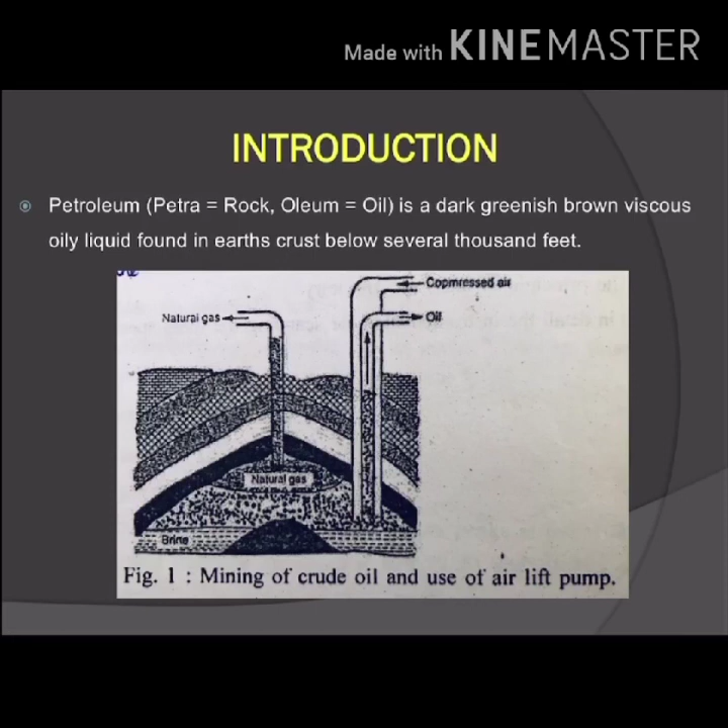What are the compositions or constituents of petroleum? Petroleum mainly consists of hydrocarbons. They may be straight chain paraffins or cycloparaffins, naphthalenes, olefins and aromatics. Along with this, small amounts of organic compounds are also present like nitrogen, oxygen and sulfur. The average composition of crude oil is carbon 79 to 87 percent, hydrogen 11 to 14 percent, sulfur in very minute percentage, that is 0.1 to 3.5 percent, and nitrogen plus oxygen slightly less compared to sulfur, carbon and hydrogen. So carbon is the major content, nearly 79 to 87 percent.

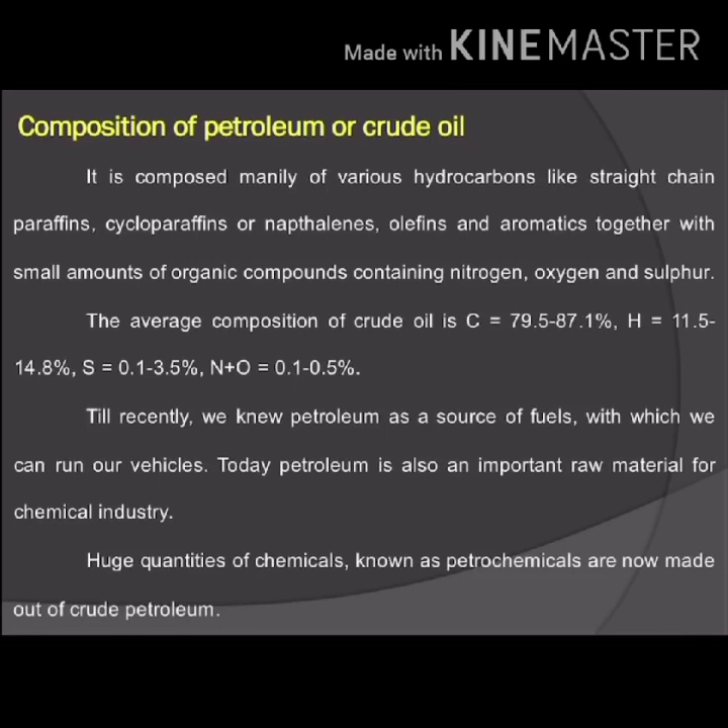Till recently, we knew petroleum as a source of fuels with which we can run our vehicles. Today, petroleum is also an important raw material for the chemical industry. Huge quantities of chemicals known as petrochemicals are now made out of crude petroleum. Now let us see how they are classified.

Based on the compositions or constituents present in the crude oil or petroleum, we classify them into three different types. The first one is paraffinic base type crude, meaning it is mainly composed of saturated hydrocarbons from CH4 to C35H72 with a little naphthalenes and aromatics. The hydrocarbons from C18H38 to C35H72 are semi-solids, also called waxes.

The second class of classification is asphaltic base type crude. It contains mainly cycloparaffins or naphthalenes with smaller amounts of paraffins and aromatic hydrocarbons. The third type of classification is mixed base type crude, meaning it contains both paraffinic and asphaltic hydrocarbons and is generally rich in semi-solid waxes.

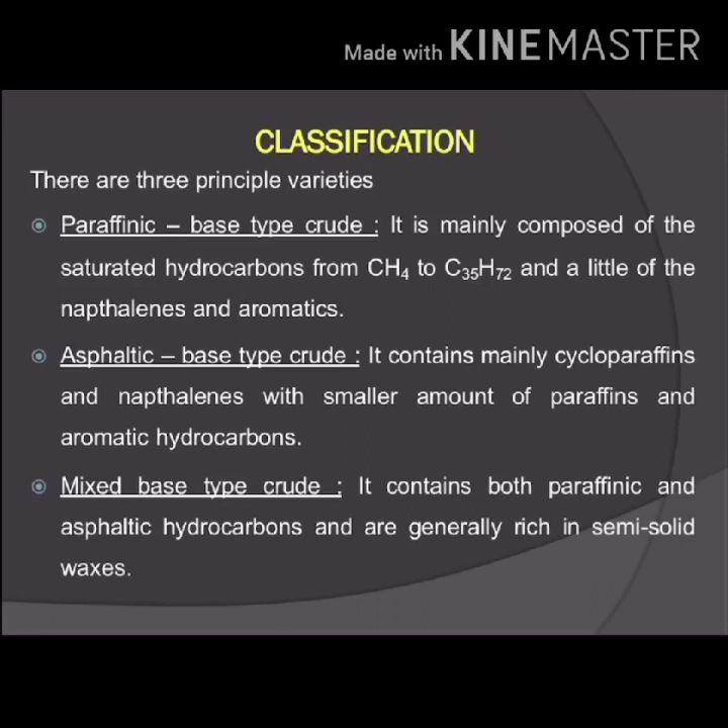Next is petroleum refining. The crude oil or petroleum mined under the earth's crust is composed of many other fuels or substituted products, so it has to be refined before we use it. The crude petroleum has to be processed or refined before being put to commercial use. The process of separating crude oil into various useful fractions by fractional distillation and finally converting into desired specific products is called refining of crude oil.

The plants set up for this purpose are called oil refineries. The refining of petroleum or crude oil involves the following steps.

Step 1: Separation of water by Cottrell's process. In this process, the crude oil obtained from the oil well is an unstable emulsion of oil and salt water, so some amount of water will also be present in the crude oil extracted from under the earth's crust. This water has to be removed, and the removal of water is carried out by Cottrell's process.

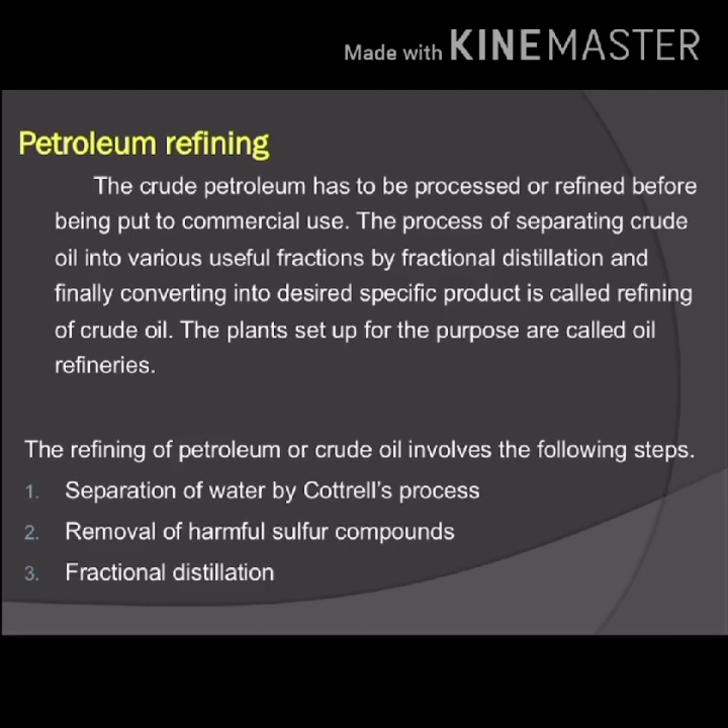The third step is fractional distillation. The crude petroleum is heated to about 400 degrees centigrade in coiled pipes kept in a gas heated furnace. Here we can observe how the fractional distillation is done. All volatile components are evaporated. When the crude petroleum is heated to about 400 degrees centigrade, the volatile compounds—those that can easily get evaporated at normal temperatures—will get evaporated, leaving behind the residue of coke or asphalt.

The vapors obtained are then admitted into a specially designed fractionating column. From here we pass the crude oil inside this fractionating column, which is maintained at 400 degrees centigrade. So as the vapors go up, when the crude oil enters here, it gets vaporized.

As the vapors go up, they become gradually cooler and fractional condensation takes place at different heights of the fractionating column. Higher boiling fractions condense first, while the lower boiling fractions condense turn by turn at a definite temperature range. Here we can observe the temperature at all these stages. At the bottom, the temperature is around 600 degrees centigrade, and as it goes up, the temperature decreases. The vapors going up get condensed and converted into liquids as they rise. Each fraction obtained is a mixture of different hydrocarbons and has certain characteristics which render them useful for definite purposes.

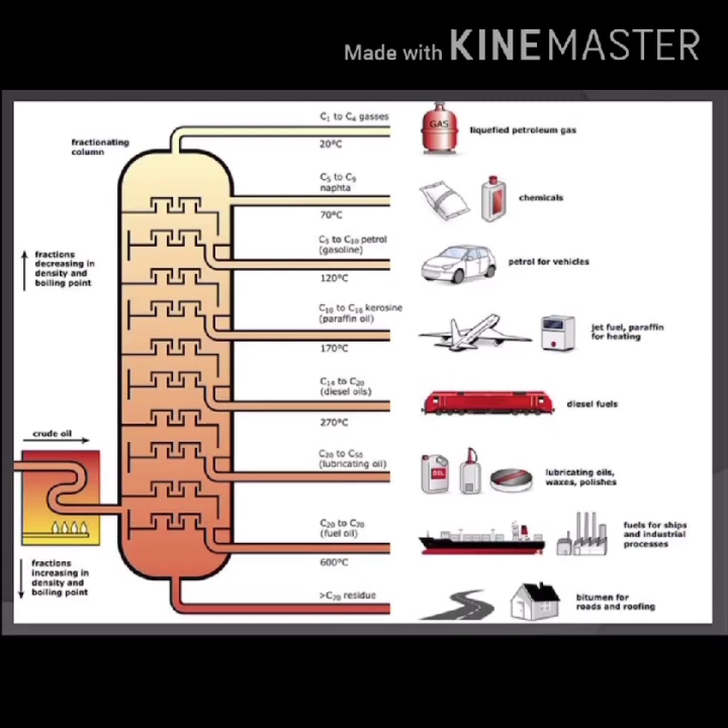The last thing is residue, which is used for the construction of roads and also for the construction of roofs in houses. These are the different important classes of fractions obtained by fractional distillation of crude oil. I have tabulated the same information here.

At different ranges of temperature we get various products such as petroleum ether or gasoline, naphtha or solvent spirit, kerosene or diesel fuel, and heavy oil. At different temperature ranges we get different important fractions of crude oil or petroleum. We can also observe the approximate composition of carbon and hydrogen, the hydrocarbons, ranging from C1 to C30, which is extracted during the fractional distillation of crude oil and petroleum.

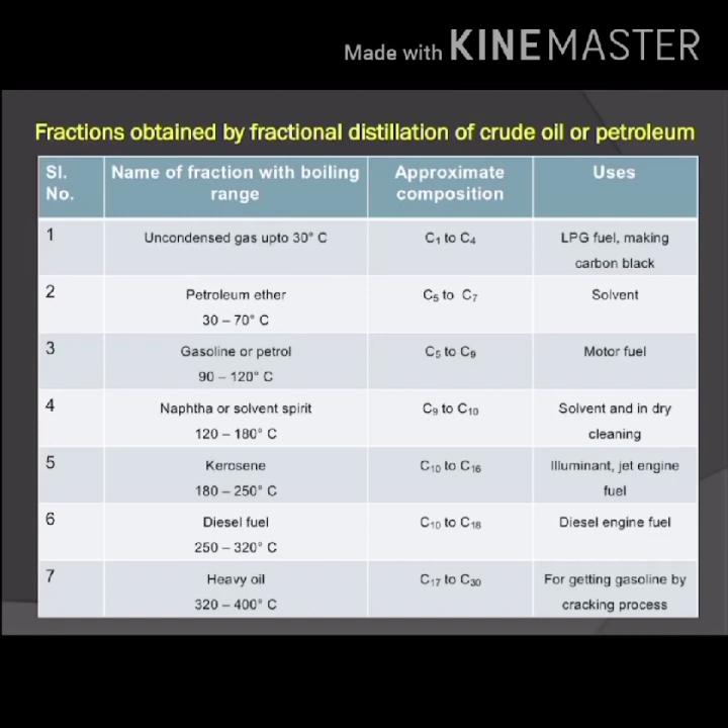The heavy oil obtained during fractional distillation of petroleum can be refractionated further, giving various fractions like lubricating oil used as lubricant, petroleum jelly also used as lubricant and in cosmetics and medicines, grease as lubricant, and paraffin waxes used in candles, boot polishes, wax paper and tarpaulin clothes. These are some other fractions extracted from heavy oil.

Above 400 degrees centigrade, a residue is obtained which may be either asphaltic or petroleum coke, with composition above C30. Asphaltic is used in waterproofing of roofs and road making. Petroleum coke is used as a fuel and in molding or light rods, and also used in protective paints.

Next is, what is meant by cracking?

Before understanding cracking, the various petroleum products given in this table need to be purified prior to use. The purification is essential for these reasons: first, removal of undesirable odors; second, to render them stable to air oxidation; and third, to free them from corrosive constituents. These are the main three reasons why purification is needed before using the heavy oil.

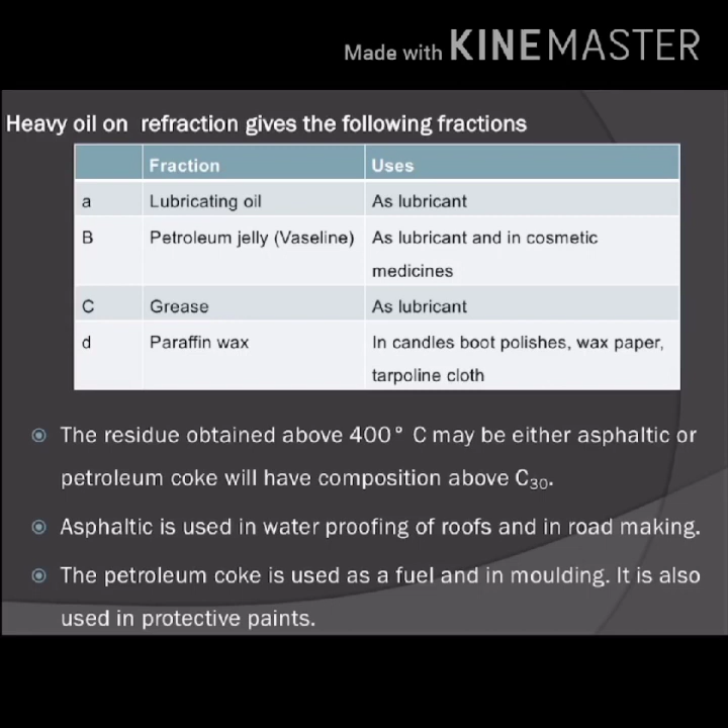The complete removal of sulfur compounds in gasoline is ensured by treating it with sodium plumbite, or by passing vapor of gasoline over alumina or silica at about 450 degrees centigrade under pressure.

What is meant by cracking? The gasoline or petrol has the largest demand as motor fuel, but the yield of this fraction is only 20% of the crude. The quality of straight run petrol is not high; it has to be properly blended. To overcome these difficulties, the middle and heavy oil fractions are cracked to get petrol.

Cracking is defined as the process of breaking down less volatile higher hydrocarbons from petroleum into different types of more volatile lower hydrocarbons. Here in this reaction, C10H22 hydrocarbon under high temperature and high pressure is converted into lower hydrocarbons which are more volatile compared to C10H22.

In the same way, N-decane in the presence of high temperature and high pressure is converted into N-pentane and N-pentene, which have a more volatile nature. So the petrol obtained by cracking has far better characteristics than the straight run petrol. That means straight run petrol is the petrol obtained during fractional distillation, whereas the petrol prepared or synthesized by the process of cracking has far better characteristics.

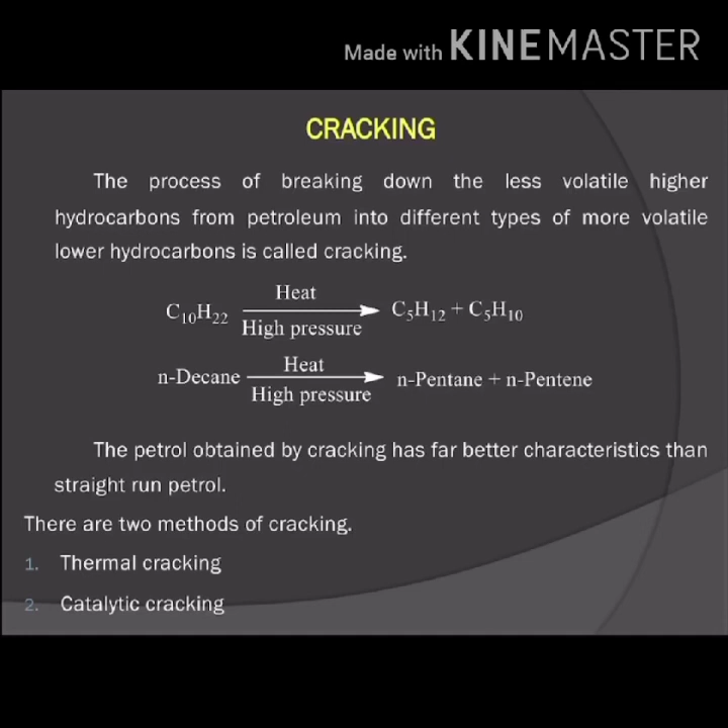So the two methods for cracking are thermal cracking and catalytic cracking. Thermal cracking may be carried out in the vapor phase and also in liquid phase. In vapor phase thermal cracking, the cracking oil is first vaporized and then cracked at about 600 to 650 degrees centigrade under a low pressure of 10 to 20 kg per square centimeter.

It requires less time than liquid phase cracking. The petrol obtained has better anti-knock properties. However, the petrol obtained by this method has poorer stability than the petrol obtained by liquid phase cracking. This method is applicable only to those oils which can be vaporized.

The next method is liquid phase thermal cracking. In this method, the heavy oil stock is cracked at a suitable temperature range of 475 to 530 degrees centigrade and at a pressure of 100 kg per square centimeter. The cracked products are then separated in a fractionating column. The yield is about 50 to 60%, and the octane rating of the petrol is 65 to 70.

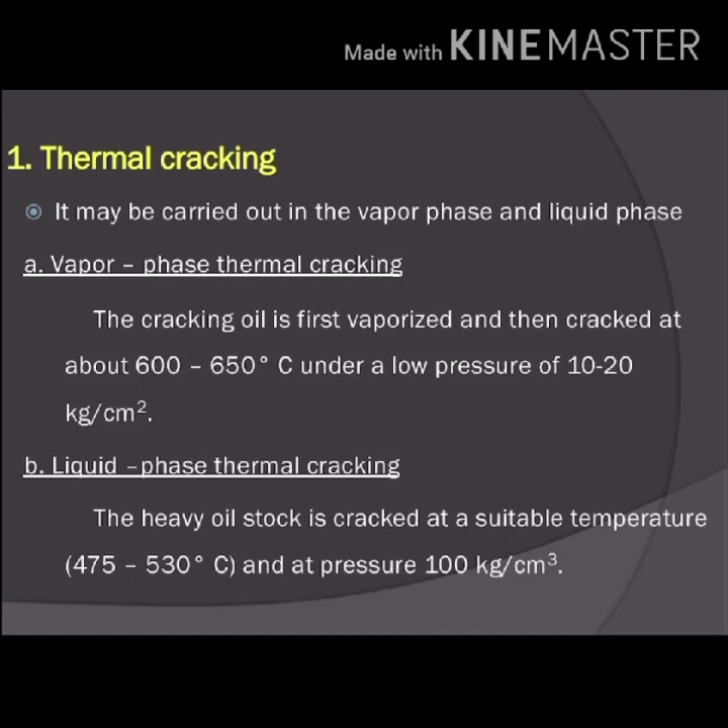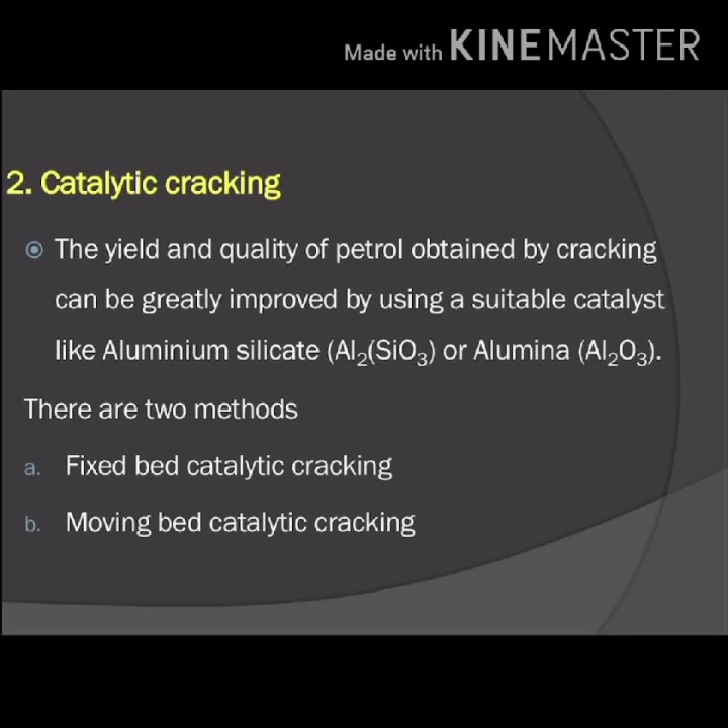The next method of cracking is catalytic cracking. The yield and quality of petrol obtained by cracking can be greatly improved by using a suitable catalyst like aluminum silicate, Al2SiO3 thrice, or alumina Al2O3. There are two methods in catalytic cracking: fixed bed catalytic cracking and moving bed catalytic cracking. Now let us see how cracking is performed using the fixed bed catalytic cracking method.

So here I am displaying a picture. The cracking furnace consists of the following towers shown in the figure: first is preheater, second is catalytic chamber, third is fractionating column, fourth is cooler, and fifth is collector. These are the different parts present in this fixed bed catalytic cracking.

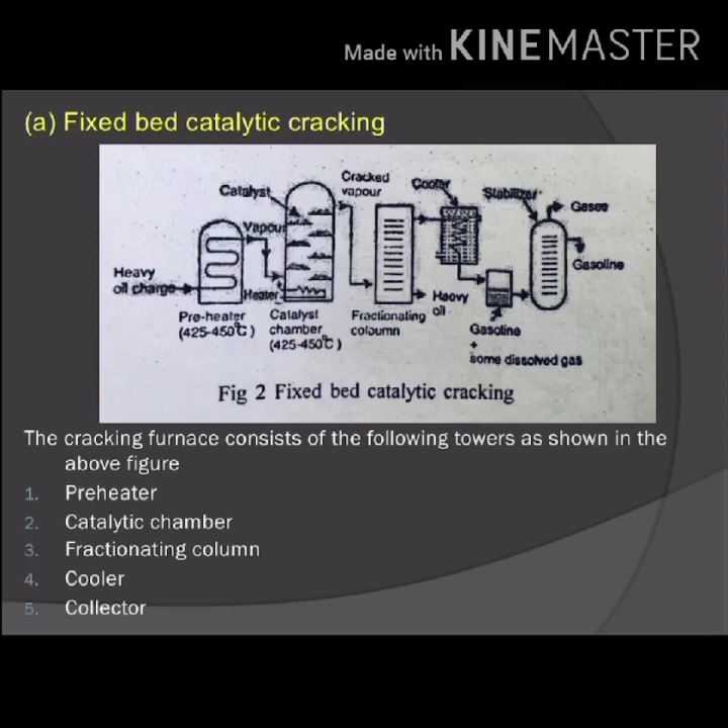The next method is moving bed catalytic cracking. The moving bed catalytic cracking furnace consists of the following parts: catalyst regenerator, reactor, fractionating column, cooler, and stabilizer.

In the catalyst regenerator, it is maintained at 600 degree centigrade at the top. There is a separator called cyclone. This is the catalyst regenerator, where we can observe a separator called cyclone, which permits only gases to pass out by holding back catalyst particles. So here it acts as a filter, separating the gases from the catalyst particles.

And this is what is called the reactor. When cracking of heavy oil takes place, at the top there is a centrifugal separator called cyclone, which allows only the cracked oil vapors to pass on and retains the catalyst particles in the reactor itself.

Now let us see the process. The solid catalyst is very finely powdered so that it behaves almost as a fluid, which can be circulated in a gas stream. The vapors of heavy oil mixed with fluidized catalyst are forced up into a large reactor. The cracking of heavier molecules into lighter molecules occurs in the reactor.

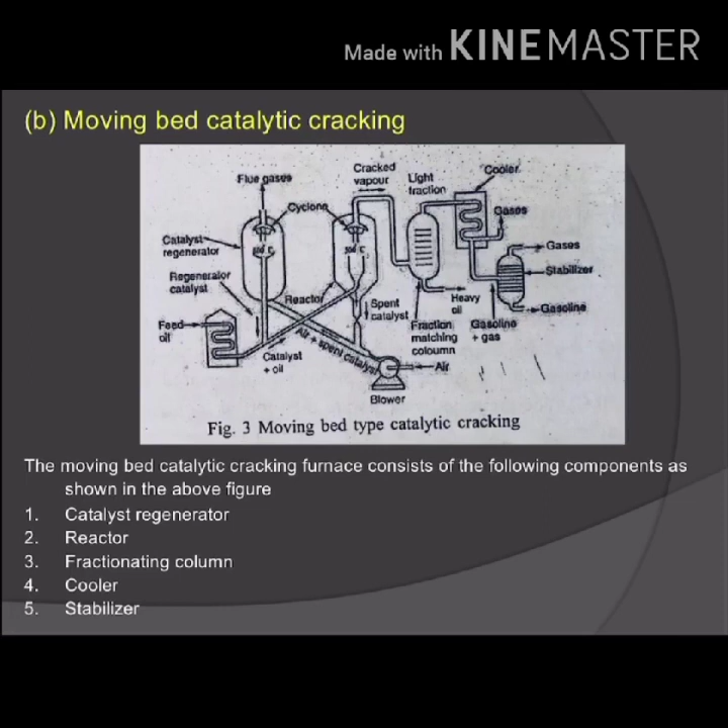Next is about synthetic petrol. The ever increasing demand for petrol and the limited sources available for its supply has stimulated attempts to synthesize petrol from alternative sources. So for the synthesis of petrol also two processes are employed: the first one is the Bergius process and the second one is the Fischer-Tropsch process.

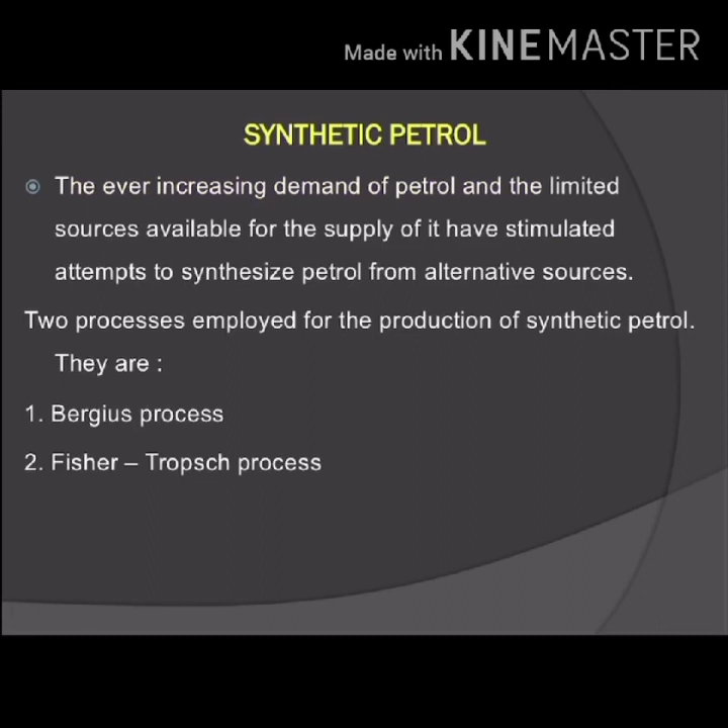Let us briefly see what exactly it means. Bergius process: in this process, the chemical plant consists of the following units, that is mixer, converter, condenser and fractionating column. So, finely powdered low ash coal is mixed with the catalyst tin or nickel oleate and made into a paste with heavy oil in the mixer. So this is the mixer.

In this mixer we are going to mix the coal, that is low ash coal, along with the catalyst tin or nickel oleate. The whole mass is heated with hydrogen at 450 degrees centigrade under pressure of 200 to 250 atmospheres for about 1.5 hours in the converter. So this is what is called the converter. To this paste the hydrogen is passed and gets mixed with the paste, contained in this converter at 450 degrees centigrade and pressure of 200 to 250 atmospheres for about 1.5 hours.

The hydrogen combines with coal to form saturated hydrocarbons. They decompose at prevailing temperature and pressure to yield low boiling liquid hydrocarbons which vaporize. The issuing gases are then led to the condenser where a liquid resembling crude oil is obtained. The crude oil is then passed into the fractionating column, where it is divided into three fractions: gasoline, middle oil and heavy oil. The middle oil is hydrogenated in vapor phase in presence of solid catalyst to yield more gasoline. The heavy oil is used again for making paste with fresh coal dust and catalyst.

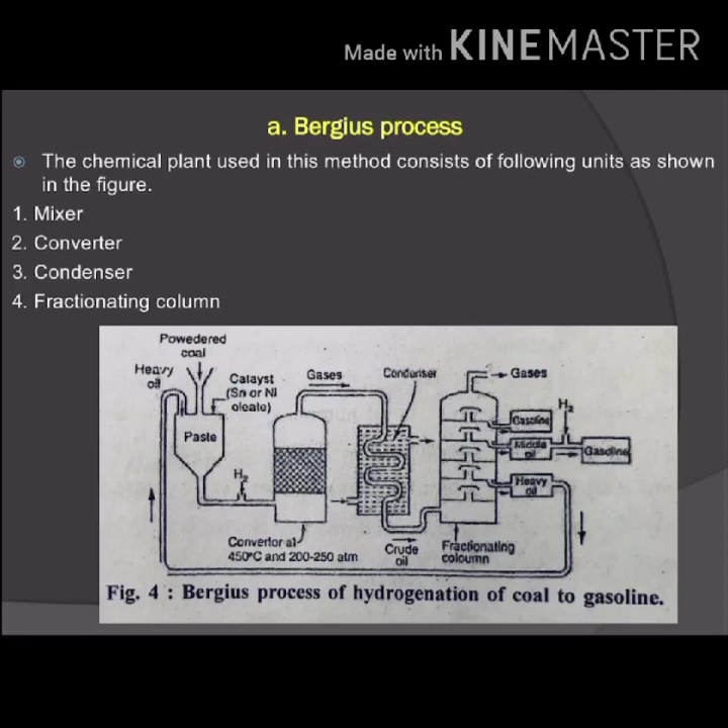The next process of synthesizing petrol is the Fischer-Tropsch process. In this method, petrol is synthesized from water gas and hydrogen in presence of a catalyst. The catalyst is a mixture of 100 parts cobalt, 5 parts thoria, 8 parts magnesia and 200 parts Kieselguhr, maintained at 200 to 300 degrees centigrade and 5 to 25 atmospheric pressure.

Here, n moles of carbon monoxide react with 2n plus 1 moles of hydrogen to form CnH2n plus 2, plus n moles of water. And if we use n moles of carbon monoxide plus 2n moles of hydrogen, we get CnH2n with the removal of n moles of water molecules. This composition of carbon monoxide and hydrogen is called synthetic petroleum. The synthetic petroleum obtained is then distilled in the usual manner to get petrol, kerosene oil, lubricating oil and paraffin wax.

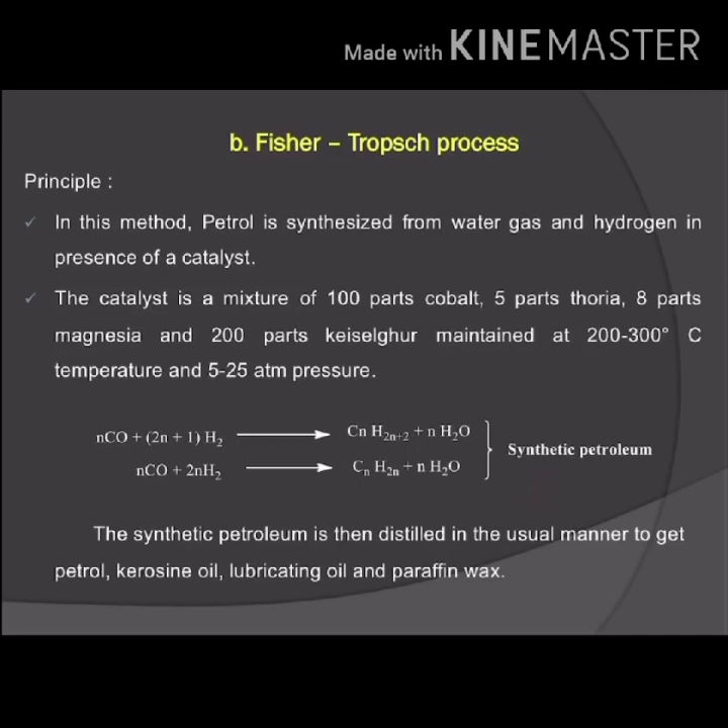The plant used for the synthesis of petrol by the Fischer-Tropsch method consists of purification unit, compressor, catalyst chamber, cooler, fractionating column and cracking unit. First, the water gas has to be prepared. To prepare the water gas, we react red hot coke with steam to get water gas, that is the mixture of carbon monoxide and hydrogen.

The water gas is mixed with half its volume of hydrogen, so that the gaseous mixture consists of carbon monoxide and hydrogen in the ratio 1:2. The gas mixture is purified by passing through a first tower to remove hydrogen sulfide, and then through a second unit to remove organic sulfur compounds. So these are the two purification units. In the first unit, hydrogen sulfide is removed, and in the second purification unit we remove organic sulfur compounds.

Once removed, the purified gas mixture is compressed in the compressor. This compressor is maintained at 5 to 25 atmospheric pressure and then led through the catalyst chamber, maintained at about 200 to 300 degrees centigrade. A mixture of saturated and unsaturated hydrocarbons is formed, as explained earlier in the previous method.

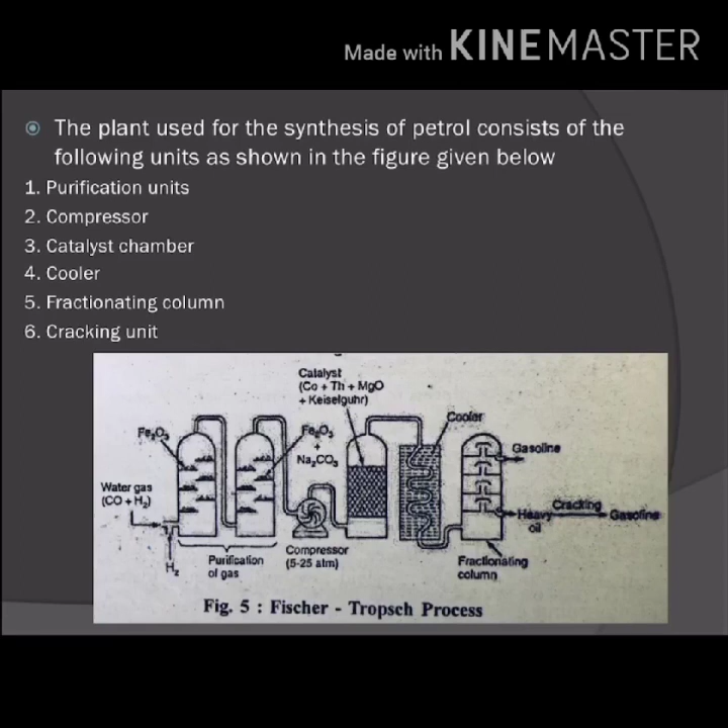The next important topic is knocking. Petrol and diesel are largely used in internal combustion engines. So what is meant by internal combustion engines? We all have seen it, but right now it may not come to mind what exactly it means. There are two kinds of internal combustion engines currently in practice: the first is the spark ignition gasoline engine, and the second is the compression ignition diesel engine.

Most of these combustion engines are 4-stroke cycle engines, meaning 4 piston strokes are needed to complete a cycle. Now just imagine the engine present in our vehicles, that is two-wheelers. In two-wheelers also the spark ignition gasoline engine is present.

The fuel consisting of petrol vapors and air is compressed and burnt within the cylinder of the engine. This is what takes place inside the engine, which we can see in our two-wheelers. The initiation of the combustion reaction takes place by a spark in the cylinder. After initiation, the flame should spread rapidly and smoothly through the gaseous mixture, thereby the expanding gas drives the piston down the cylinder. So this is the mechanism that takes place inside an internal combustion engine.

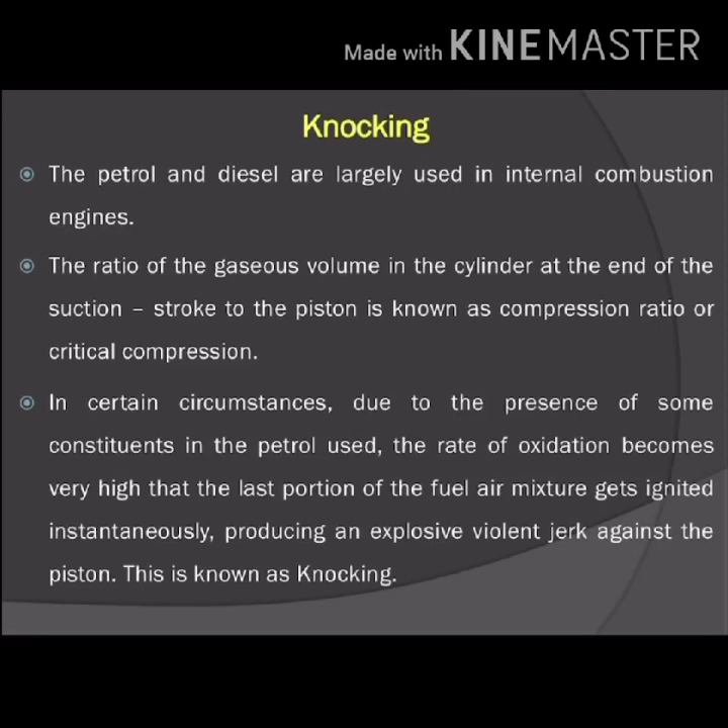What is the chemical structure related to knocking? The knocking property of petrol depends on the chemical structure of its constituents. That means the composition present in the petrol, whether it has a straight chained paraffin structure, a branched chain paraffin structure, or whether it contains olefins, cycloparaffins, or aromatics, likewise depends upon the constituents present in the petrol.

The tendency of fuel constituents to knock follows an order: straight chain paraffins have higher knocking property than branched chain paraffins, branched chain paraffins have higher knocking property than olefins, olefins have higher than cycloparaffins, and cycloparaffins have higher knocking property than aromatics. Thus, aromatic constituents have the least knocking property and straight chain paraffins have the highest. This is what the chemical structure of the constituent present in the petrol explains.

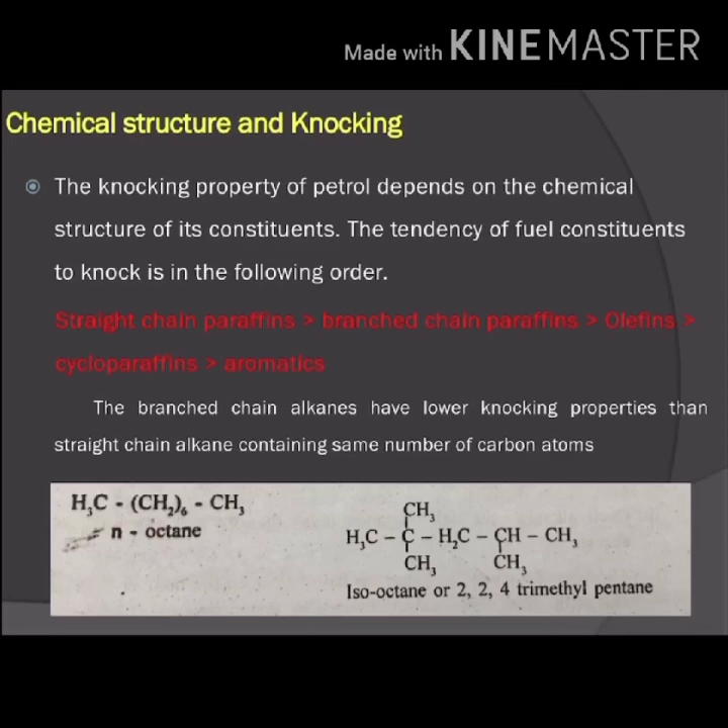The compression ratio at which knocking results depends upon the nature of the fuel. It is therefore important to determine the so-called anti-knock value of a fuel. The anti-knock value of petrol is expressed in terms of octane rating or octane number, while the cetane rating or cetane number is used to rate diesel fuel.

At this stage, I am going to stop here. In my next presentation, we'll discuss what is meant by octane rating or octane number, what is leaded and unleaded petrol and its advantages, and what is meant by petrochemicals and their applications. Thank you for your patience.